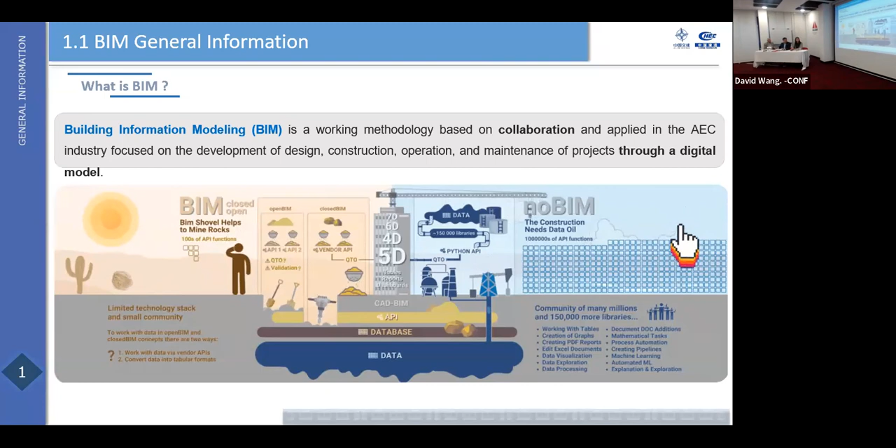Next one please - that's a brief history of BIM development. This concept came out from the 1970s. It was quite preliminary, and gradually it developed, changing the name, concept and content, up to 2001 when the name was fixed as BIM.

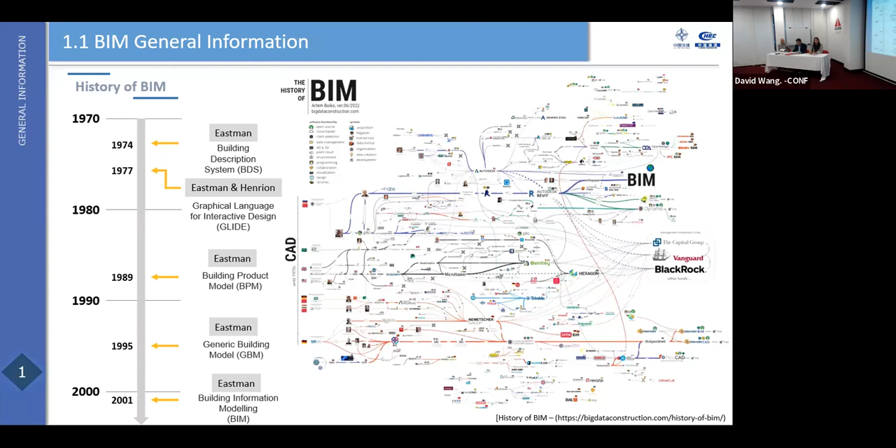You can see on the right hand side, from CAD - computer aided design tools - through different paths, multiple paths of people and technologies, and finally we got BIM technology. Nowadays it's well known, and all the developers and projects come with this.

Okay, so when I talk about BIM, we cannot avoid talking about the level of BIM. Here we start from level 0, 1, 2, 3 - that's the common use from the modern engineering design stage. Level 0 is quite a classic way.

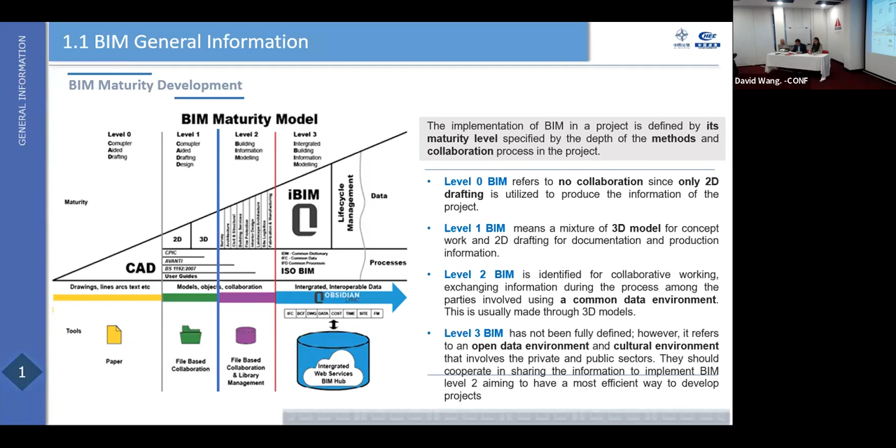It's just 2D drafting, and at level 1 we come into the 3D model and 2D drafting and production from the 3D model. At level 2 we started considering all the models - we need to build a common database for all the models. At level 3 we create an open data environment for crossing the disciplines. So that's the three levels for BIM.

So next slide, we're going to show the full picture, from 1D to 6D. That's for now - most of the design stage we stop, we go up to the 3D, level 3.

And from level 4 - actually we have level 7 at the end. From 4D up to 7D is for the construction and maintenance, the operation maintenance, and the project management.

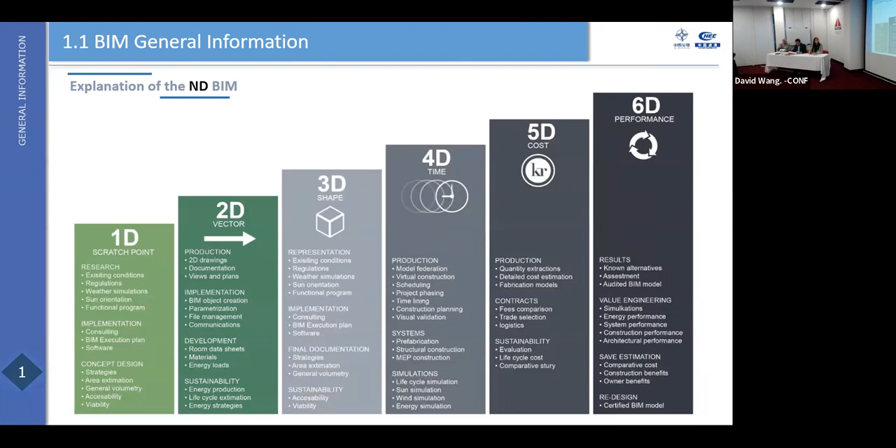Okay, here is an example - I don't know whether it's showing clear. There's an example for the BIM execution requirement. Normally, when we get a project, especially a large scale project, we'll plan the project in BIM in line with the planning stage, design stage, construction, and operation - the full life cycle. So I just want to show you BIM applications over the life cycle.

At the moment we have the international standard, and for this kind of project, during the planning stage, we have to start to know what's the requirement or needs from the operator, because in BIM, like I said, the information is the key, is the core for this technology. So the information has to start from the planning stage through the design stage, construction stage, operation, and finally handed to the operator.

Okay, so you can see this - you can see the different bar, some applications from the plan stage all the way through to the operation stage. Like the modeling, the cost and quantity, sometimes for coordinations, and some like property codings. So this will be all the way from planning to operation, and some are just for a single stage, but it will be covered.

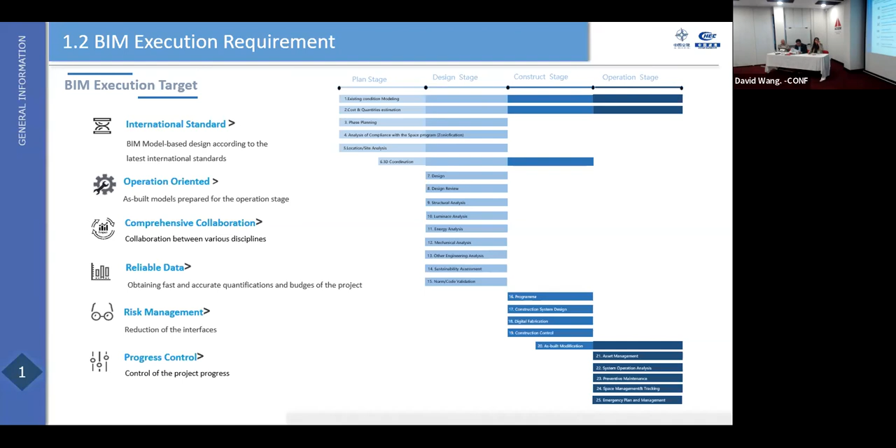So this one has a little bit more detail for the arrangement, from the design, construction up to the operation and maintenance. So the demand from the operational team shall be highlighted in the design and construction stage, such as the information, the LOD, and asset coding. That's quite important, because that coding is like the ID for everybody. So the coding in BIM is like the ID for every single element from the beginning. So when one element is created, it should be allocated a code. This code will be permanent with this element, no matter if it's a pile, a beam, a column, or mechanical equipment. So this kind of asset ID is quite important, and has to be agreed upon from the early stage between the designer and the operator.

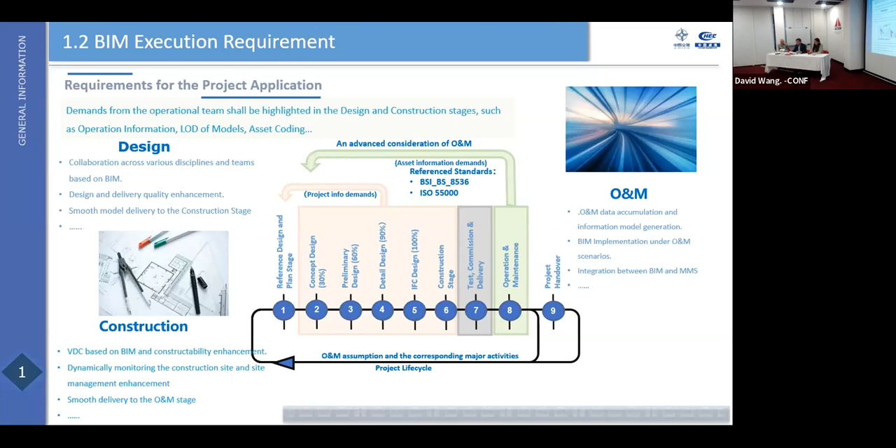Otherwise, the designer will have their own understanding in asset management. Sometimes the operator comes into the picture a little late in the project. We had some experiences where when the operator comes late, they have their own system, their own procedures to manage the assets, and maybe this is totally different from the designer's understanding. So there will be a disaster, because at that moment the design is almost done and maybe construction has started, and all the information is attached to the model. If we want to rewrite this model with the new code, that would be a lot of work and could create more errors and mistakes. So that's why I want to highlight that the coding in BIM technology is quite important at the design stage. As experienced designers, we have to grab all this requirement before carrying out the design works or the model.

Okay, this is a general sketch for the BIM organization. So just as an example, for a PPP project we have a concessionaire, leading designers, some design subcontractors, the project management team, the delivery team, and the downward executive levels, the disciplines. You can see this sketch with different circles. So it's centralized with the concessionaire, and the designer is quite critical at the design stage. Going outward are the subcontractors, the management team, and the delivery team. So that's the position of every different role in the project in the BIM organization. So the concessionaire's requirement is the most important.

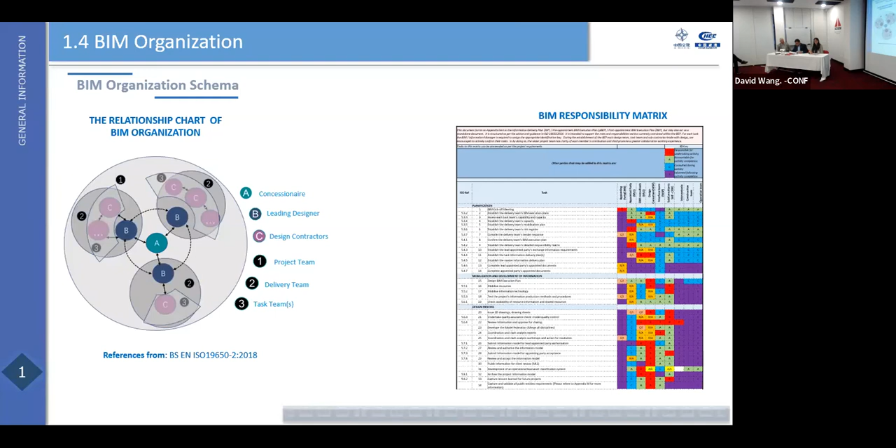On the right hand side, this is the responsibility matrix. It specifies in detail the responsibility of different roles in certain single actions. So we can share this information with you. After that, it's a little small to see.

First of all is coordination, because for the large scale project we have multi-disciplines. Every single discipline has their own design standards, but the coordination between disciplines is quite important. This is a fundamental guarantee for the BIM model. When we create the BIM model, all the disciplines have to talk to each other every day, to make sure all the models are perfectly matched to each other.

Secondly, about communication. This communication is different from coordination. Sometimes this communication is from the client, from third parties, from suppliers. So communication from outside, from external sources, also has to be paid more attention to, because that external demand is also an input to the design.

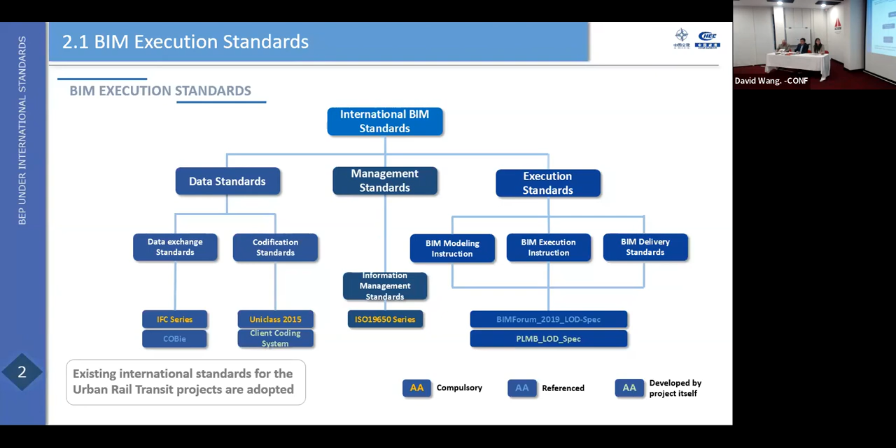Okay, next one. So that's the picture for the standard. ISO 19650 is the first international standard shedding light on how to conduct the life cycle from design to asset management based on BIM uses.

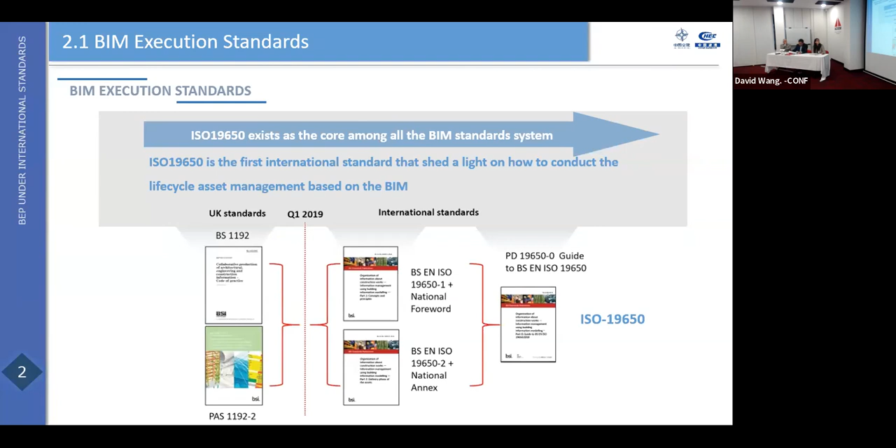Okay, next one. So that's another one showing the execution. We have Uniclass for the codification, and also LOD for the execution.

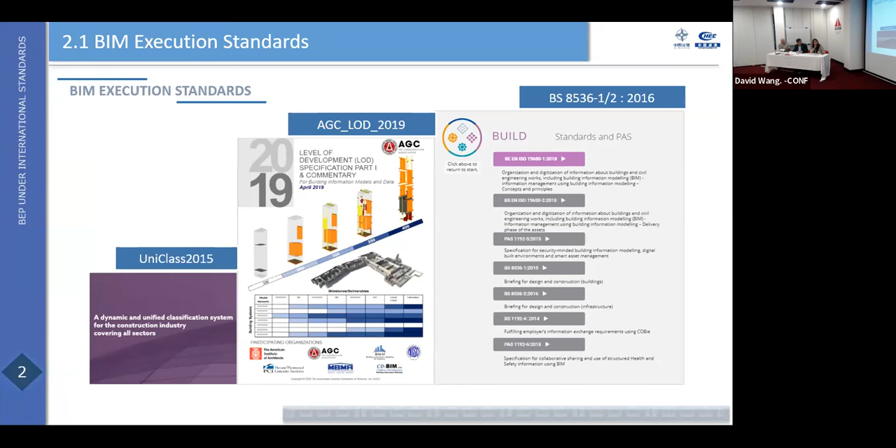Next one. Here's the BIM roadmap. We just listed the different BIM uses across the different stages of the project. In total, there are about 25 BIM uses through the different project stages. You can see the bar at the bottom with different colors - this is the development from LOD.

LOD means the precise level of the model, with the details of information attached to it. Normally, by the end of the design stage, the LOD should reach 350. After that, throughout construction, the model has to be developed with construction activities, such as quality inspection records, materials, suppliers, maintenance manuals, and defects or NCRs. All this information will be added to the model, in addition to the design information.

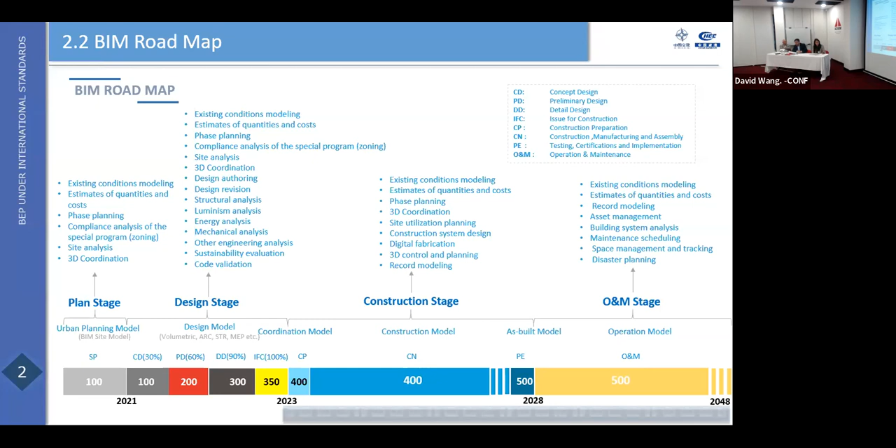So when we reach O&M, operation and maintenance, the LOD will reach 500, with additional information from testing and commissioning. So that's the LOD development roadmap.

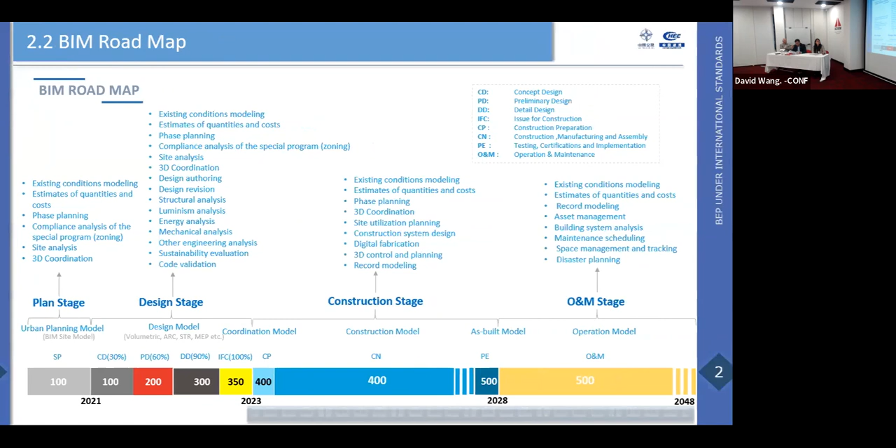So that's the BIM execution plan. That's quite famous - it's the mandatory document for every single project if we want to use BIM technologies. The BIM execution plan is quite critical for every single project.

It includes the BIM standards or resources, organizations, codifications and standards, standards or manuals for modeling, standards of procedures for model reviews, quality controls, and also information exchanges, and finally the delivery standards.

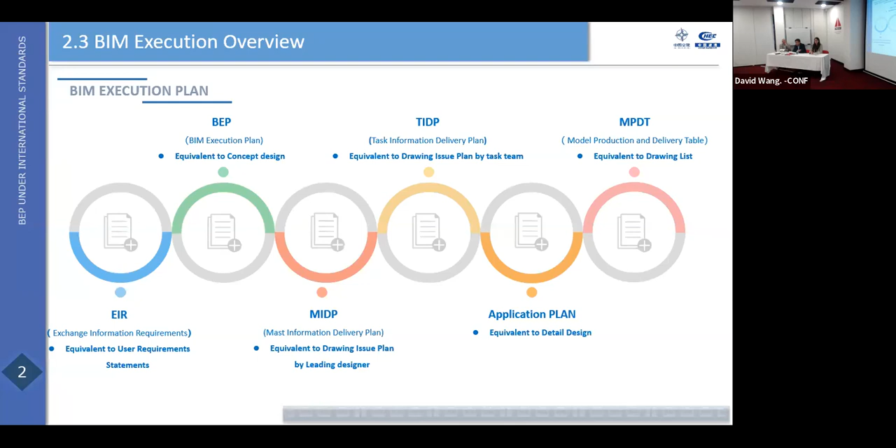So like I said, we have quite a guidebook for every designer and engineer who knows how to place BIM technologies into their daily work.

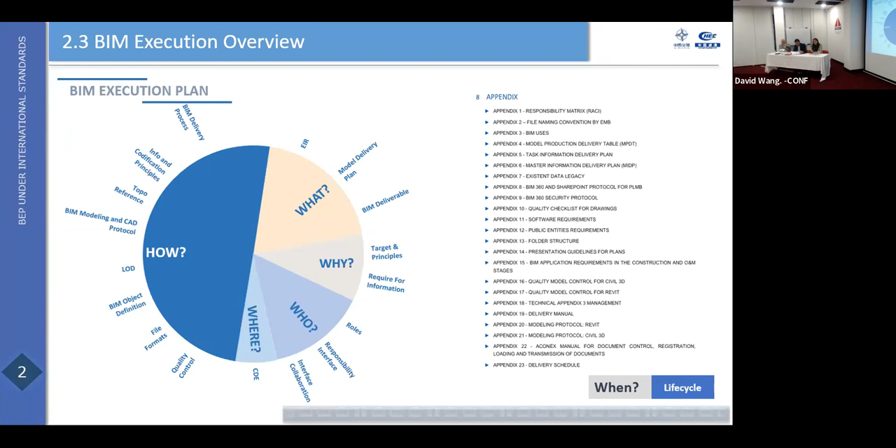In different stages, we have different parties, different teams joining the actions. At the beginning, the BIM development stage, most designers, drafters, and modelers are the majority of resources. In the internal coordination stage, the interdiscipline checks, coordinations and communications are quite important to make sure the individual models from different disciplines can work together, with no clashes or interferences.

For example, sometimes during the design stage, one discipline could be changed for some reason, but these changes have to be notified to other disciplines. So they take actions to do harmonizations and engineering checks. If they have any problem accommodating this change, they have to feed back their comments to the original parties who proposed the change. So this is not a one-round communication, it's several rounds until they reach agreement on the changes.

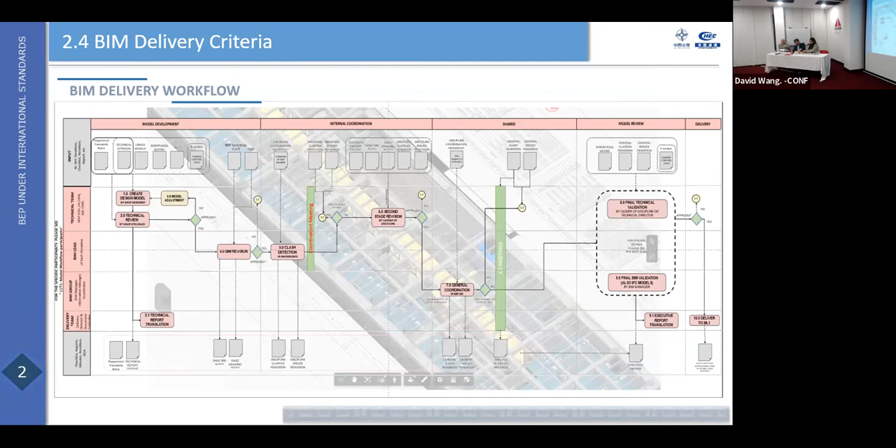From different angles, we have self-inspections. That means when the modeler starts creating a model, the company or project shall have a drafting manual or modeling manual to standardize all these modeling behaviors, from the IT development or operation level, the operation standard of the software. When the modeler completes the modeling, they have to check a checklist with different items of the basic requirements or standards. That's the self-inspection or self-check.

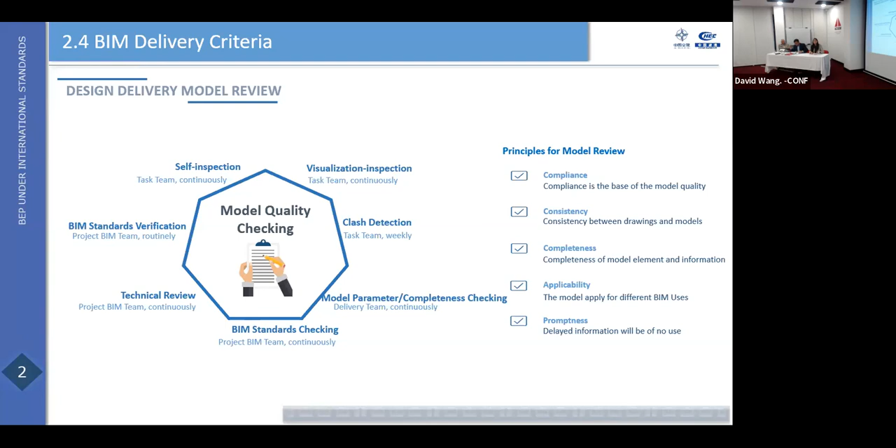So normally we put the model down to the work package level. A work package is for a location and discipline. So structural is a discipline, but the work package could be down to different locations, like one building or one segment of the road, or the corridors. So one work package should have a single BIM model. That's one-to-one, easy to check and easy to do the integrations.

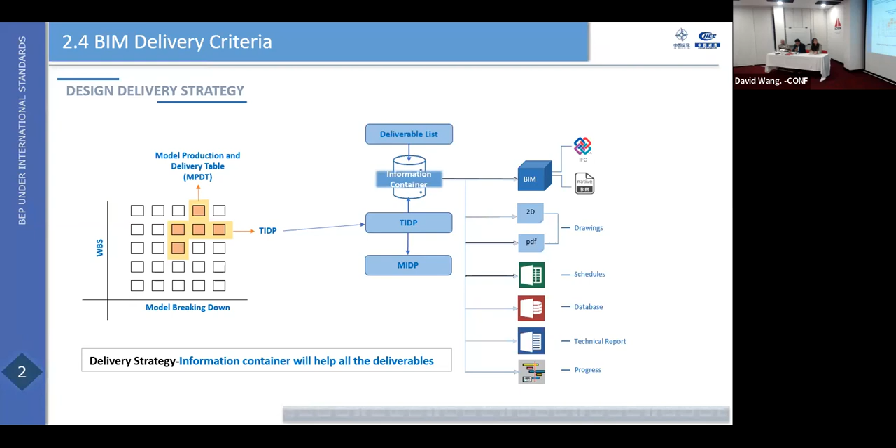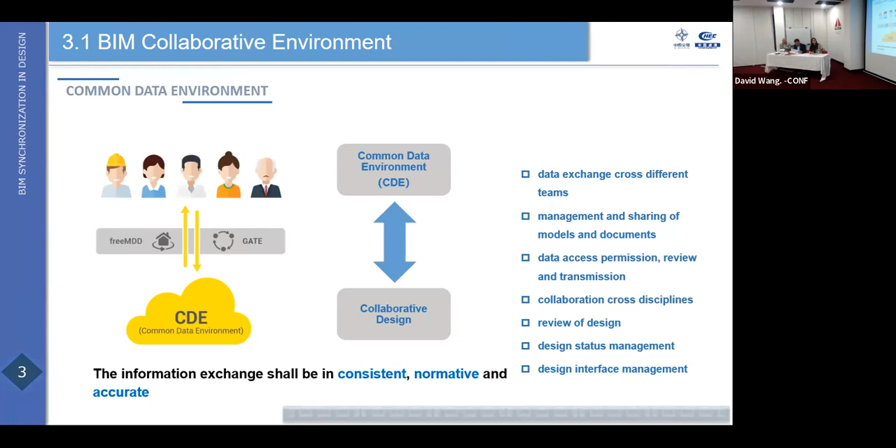So the information or the BIM from the design department - sorry, in the center is the core of the CDE. We selected SharePoint, Microsoft Teams, and BIM 360 as the core of the CDE to take care of all the information.

On the right hand side is the design group. We have different disciplines, more than two design contractors and suppliers, responsible for design and modeling. All the information is sent to this core of the CDE, and this combination of software has the functions to do storage of information and real-time communications like Microsoft Teams.

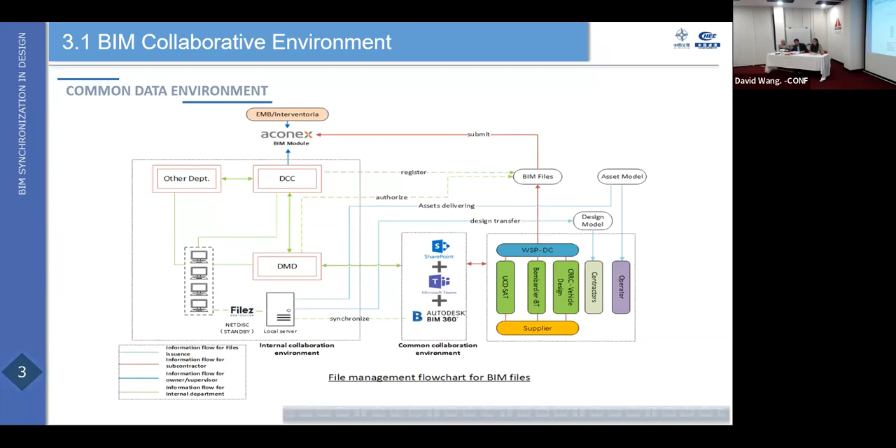So when the model enters the CDE, they will run through shared folders, whatever reviews, technical reviews, run this circle, and finally put it in the public folders and back to the modeler. The modeler will be notified after the procedure in the CDE. They get comments, and they will work again, and when they fix the problem, they release the model back to the CDE.

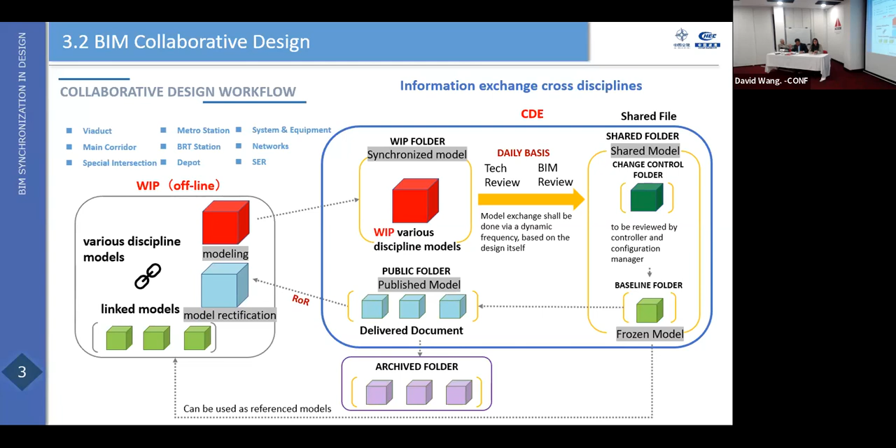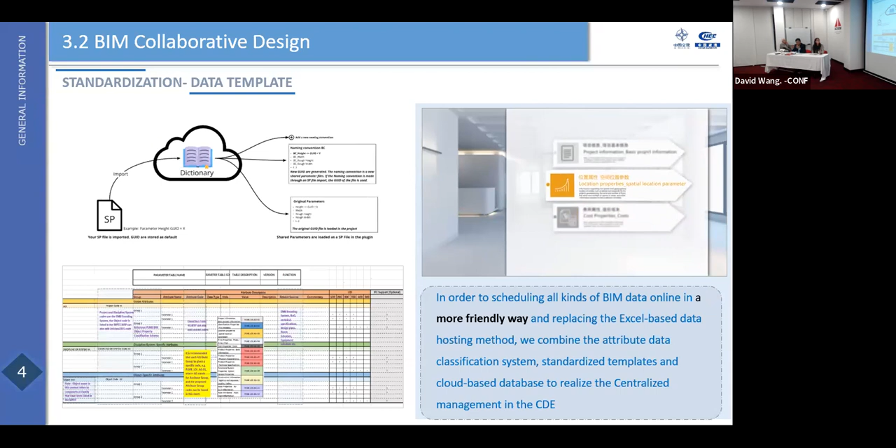Okay, that's the standardization of a data template. This is quite detailed because in order to schedule all kinds of BIM data online, we need to formalize the data template, instead of everybody doing it a different way. We combine attribute data, classification systems, and a standardized template with a cloud-based database to realize centralized management in the CDE. All these templates, tools, and procedures are for running the CDE without any issues. The CDE is a very useful tool for cooperation in design.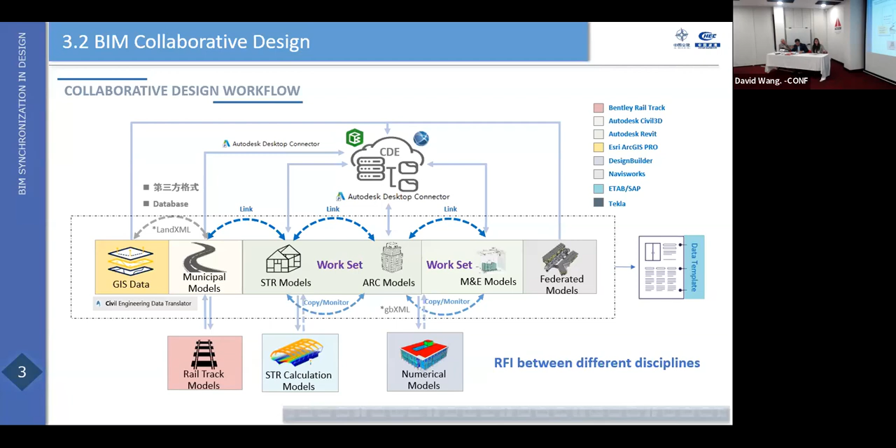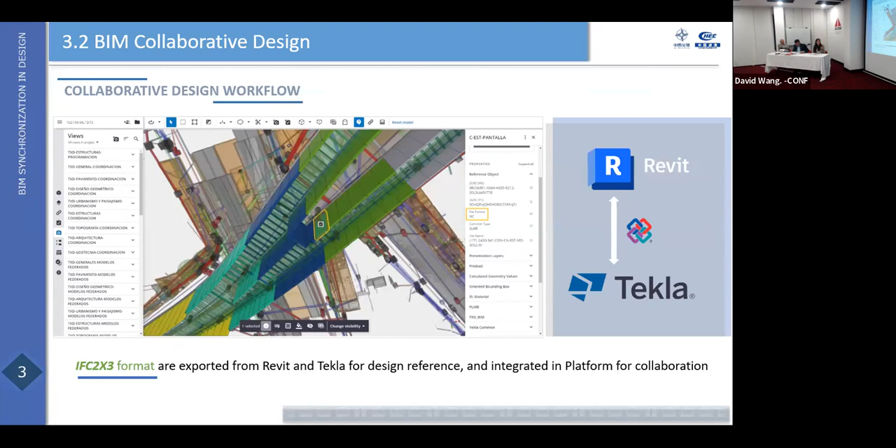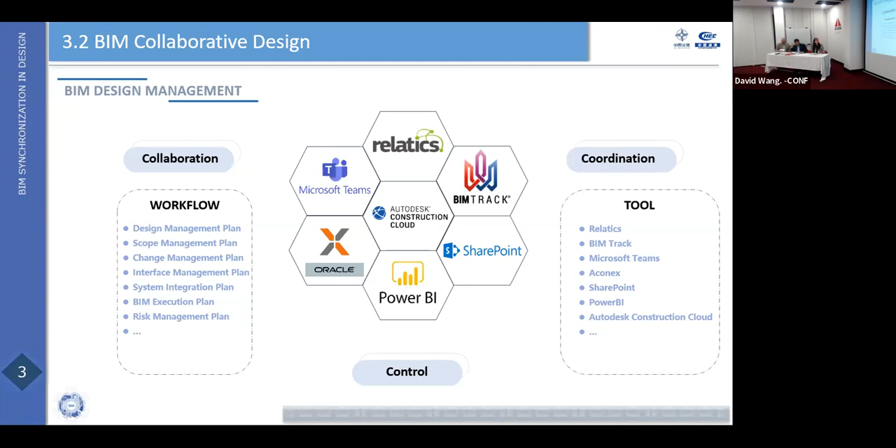This is about BIM design management. Now we have different software or platforms to handle project management or BIM management. For example, Relatics is for the interface, BIM Track is for clashes, and SharePoint and something like that. So we have more tools to handle this BIM management.

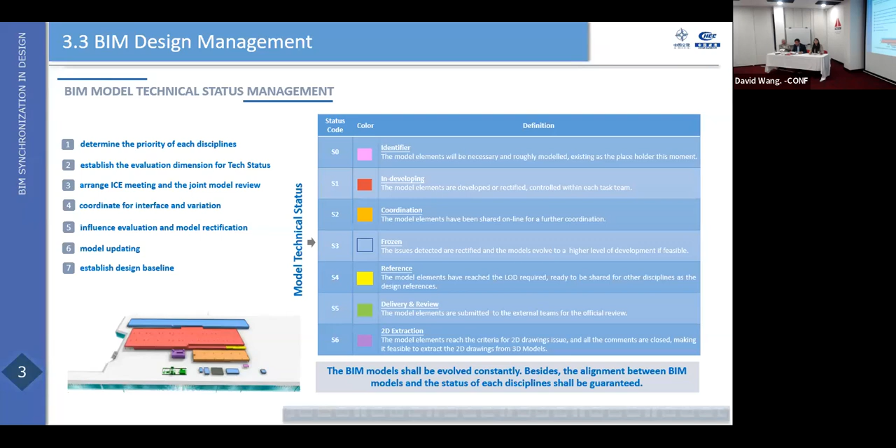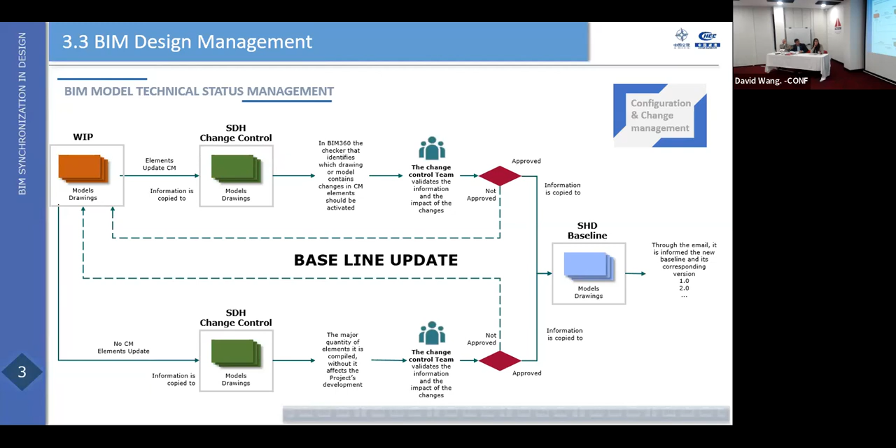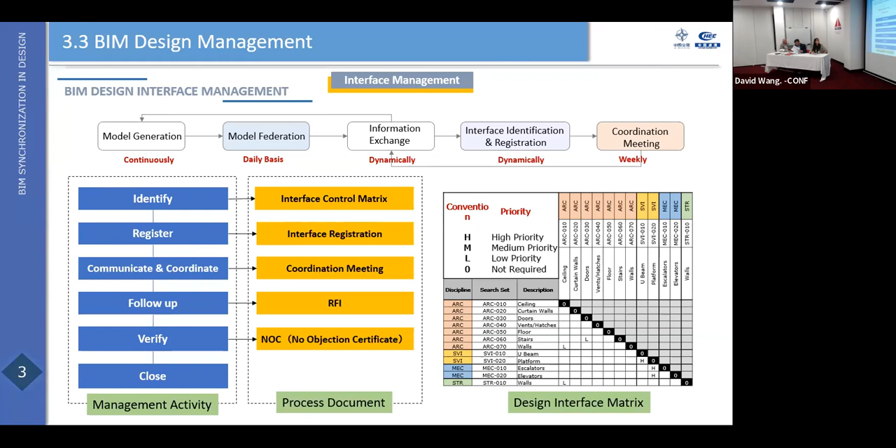This is also an example for BIM uses in interface management. Normally, traditionally, we use a matrix for interface management. As shown in the table on the right hand, we have different disciplines, and we mark in the matrix who's the interface owner, who's the party to support this interface, provide input or reviews. With BIM technology, we can visualize this. If a member or some building has an interface still open, it will be shown in different colors, highlighted to the reviewers. When you click on that member, you'll see the information of the interface - who's the owner, who's taking it, whose action is still pending or delayed/outstanding. So we take actions through the BIM model.

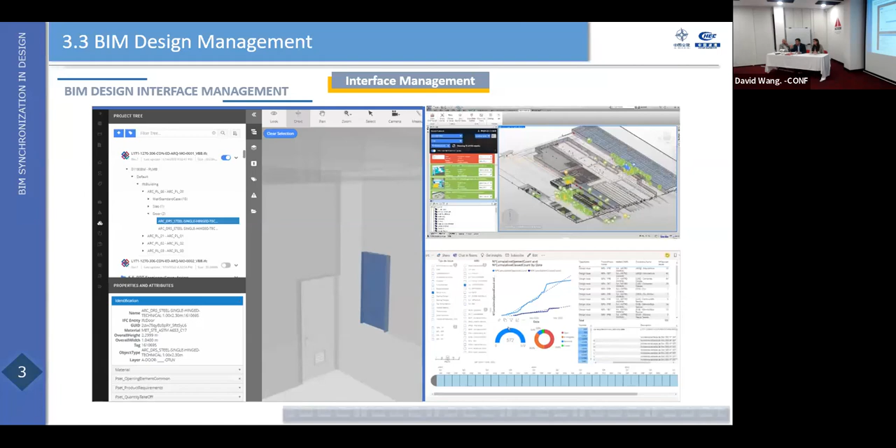From this part, we talk about construction applications. I'm not sure if this is widely used in Colombia, but it's quite widely used in China, because sometimes the area of the construction site field is quite large, so we normally use monitoring and sensors to control the site.

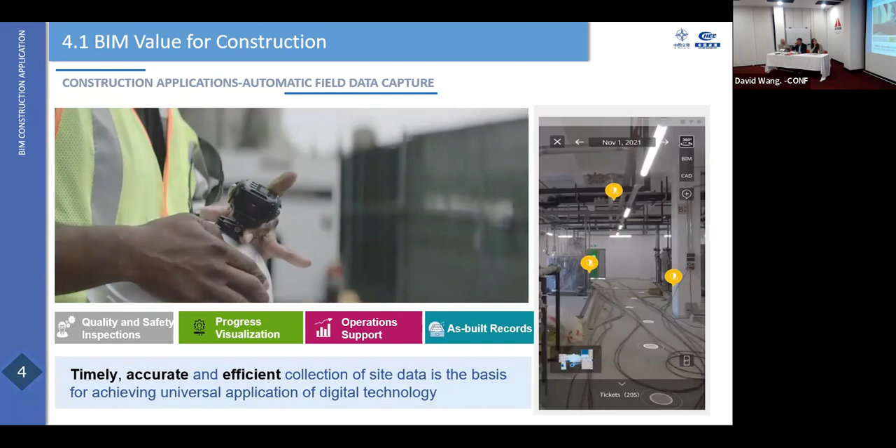This is new technology that just came from the United States. When the camera is fixed on top of the helmet, as the person walks, the camera catches all the information and transfers it to the BIM center. They can then come up with the real or simulated pictures in 3D.

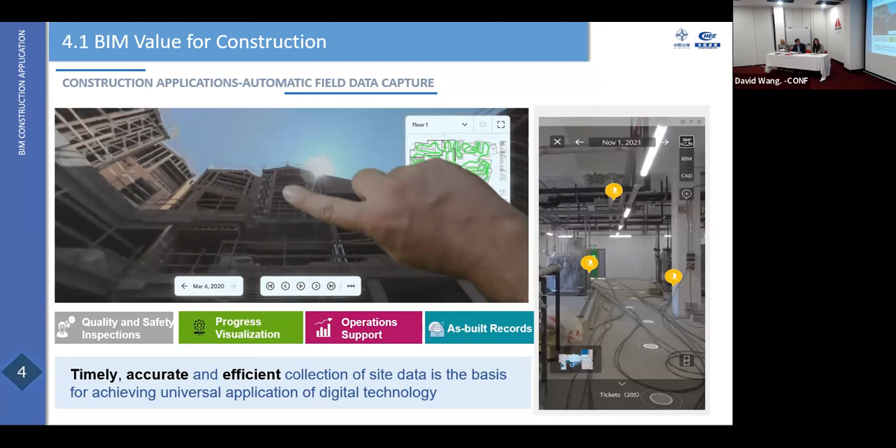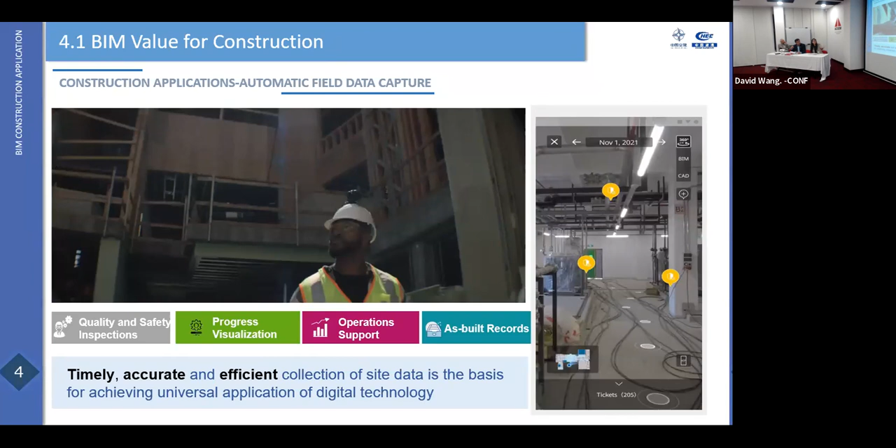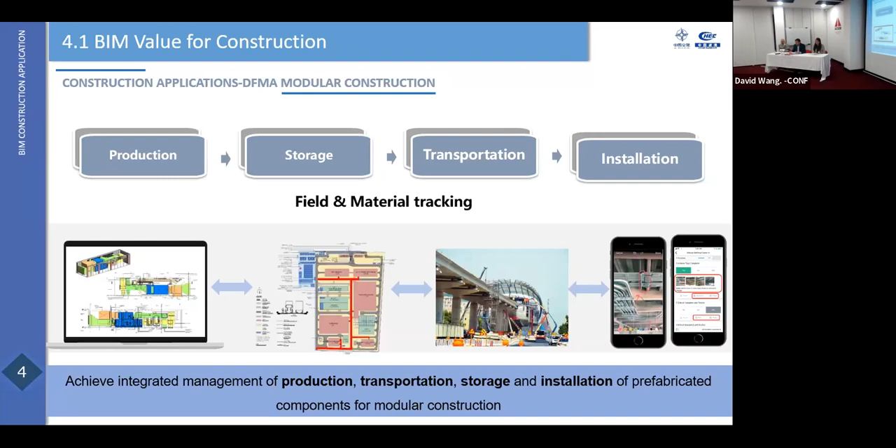This one is about the simulation of construction. With the design models, the contractor could put their idea into the construction, like sequences and machineries, how to place their machineries, and how the building is built, starting layer by layer or floor by floor. So this is a useful tool for the contractor to practice their proposals before putting them into the real planning.

When you want to know the information of some parts or elements in the building, you just click on that in the digital model. So they're identical, like twins - one in the real world, the other in the digital world.

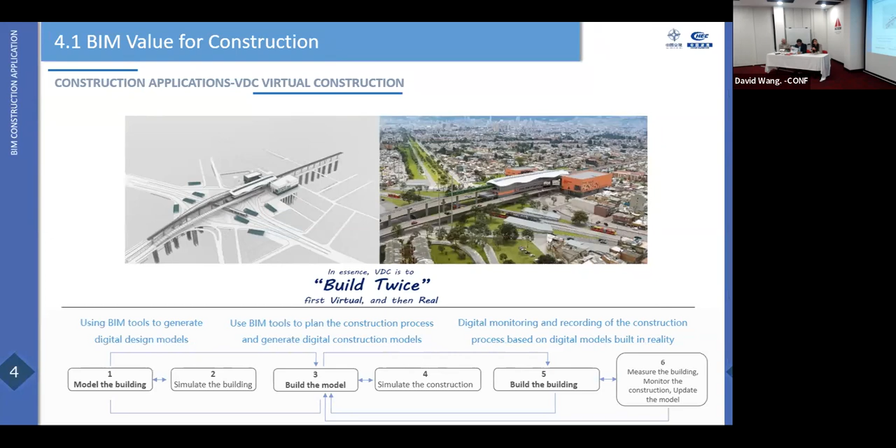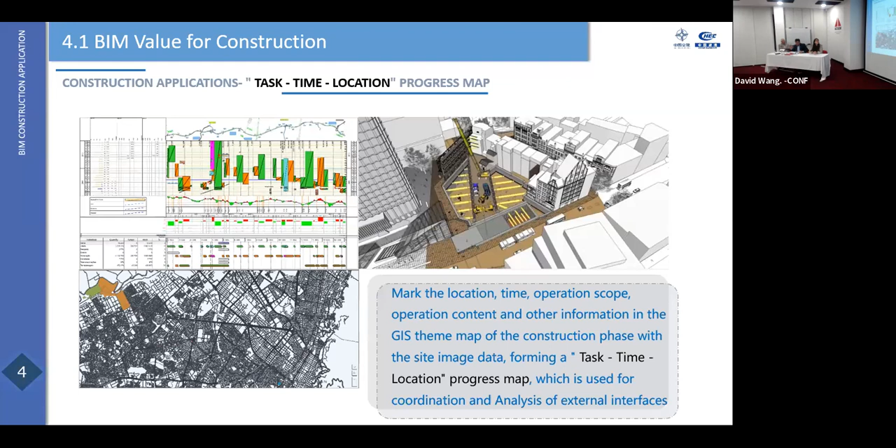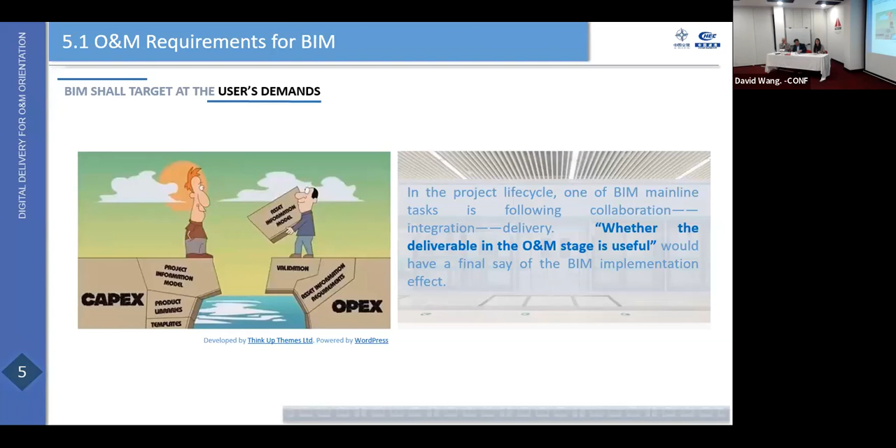Here's another example of how to put BIM to use in the operation stage. We call it the BIM plus MMS platform. MMS is like a property management platform for the operator. At the moment, as far as I know, the world is still at quite the beginning stage with this.

A lot of companies, operators, spend a lot of money on studies, on how to make this MMS platform useful and intelligent in maintenance, to reduce maintenance cost - especially management cost - and also reduce the risk of accidents caused by human judgment. So with the BIM...

It will provide large, comprehensive data from the beginning. We call this assets - asset means everything, the permanent structures and properties for the project. The operator has to manage everything, so they would like to know every tiny article, where it is, how to replace them, when they have to replace them, where the suppliers are, how to get supplier information, how to order the parts, and how long it takes for the part to arrive.

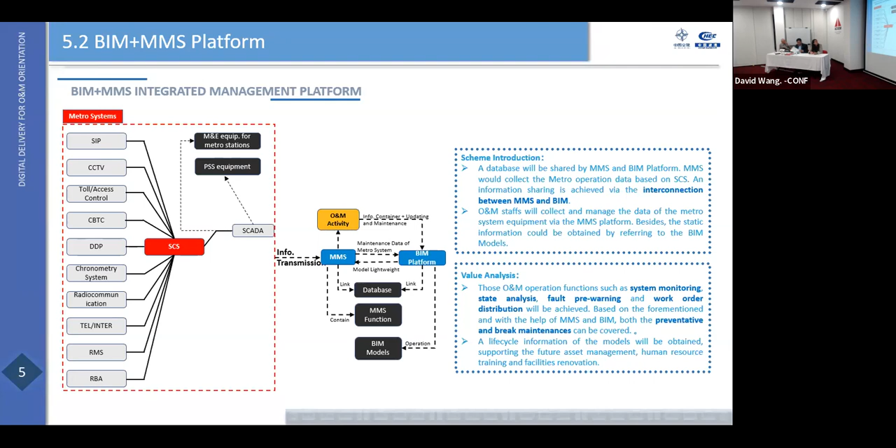Okay, so that's what the management platform looks like, but this one is still under study, I think - it's not yet quite a developed product. So that's the future.

But the modules for the platform are the basic parameters, O&M parameters, asset management, and data and information.

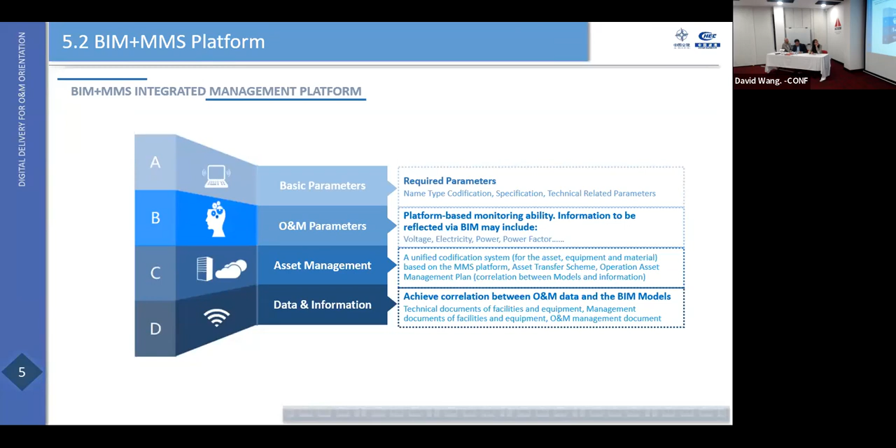...should be defined during the design stage. What is an asset for the operator? Big machines or little ones? So they have to divide by different operators. They have different focuses. Maybe some operators just focus on the big properties, but someone who really cares about cost will come down to very simple, very tiny particles. So this depends.

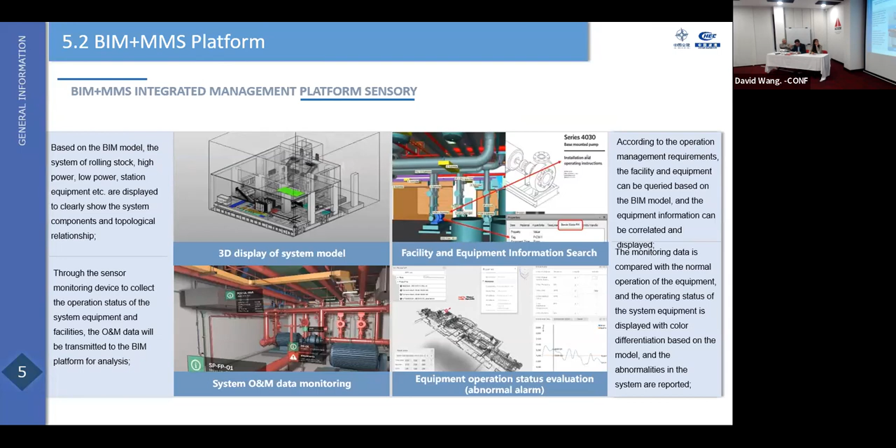Okay, and the system and O&M data monitoring has indicators attached to it. If you open that, you can see the status with monitors and equipment operation status evaluation. There are multiple functions in these status evaluations, but they have to be set up by the operators.

Okay, that's almost all. So, sorry, some Chinese here. This is to share some pictures from the China Harbor project with BIM models and BIM technologies.

This one you guys may be familiar with, it's the Panama Fourth Bridge. We know the project has been suspended, but I heard they're going into negotiation stage and maybe will restart pretty soon. We had planned with the designers 100% BIM use and the forwarding design procedures.

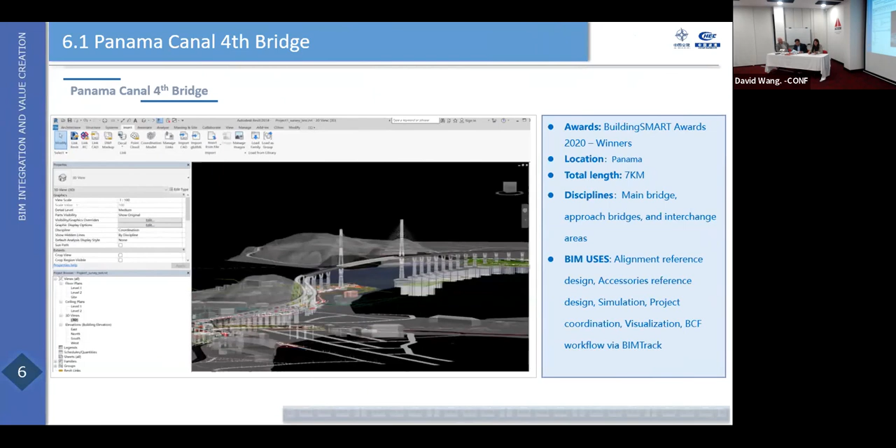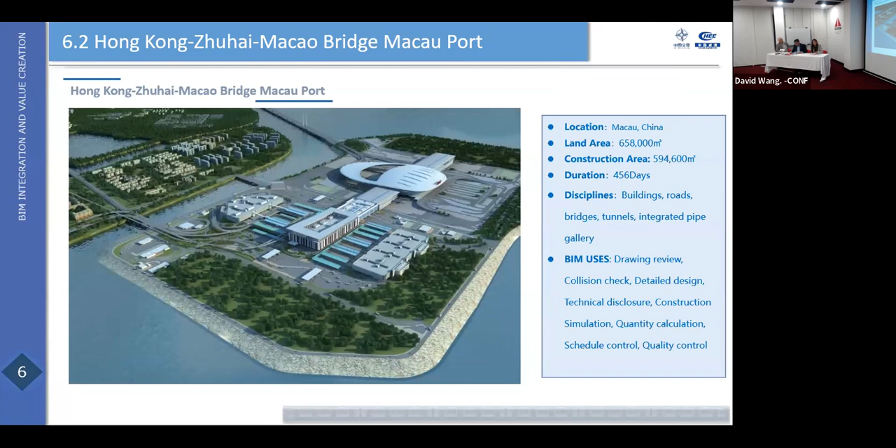Okay, and the other one is quite a long cross-sea bridge, the Hong Kong-Zhuhai-Macau Bridge. I can't remember the length, but the picture shows one of the starting points of this bridge is in Macau. All these buildings and facilities are designed with BIM elements. This project won a lot of awards in BIM.

This one was my project in Sri Lanka, Colombo Port City. It's under development, so BIM is starting to be used for this project. This is a city with multiple functions: living, business, entertainment. So BIM has to be used for this kind of large scale project.

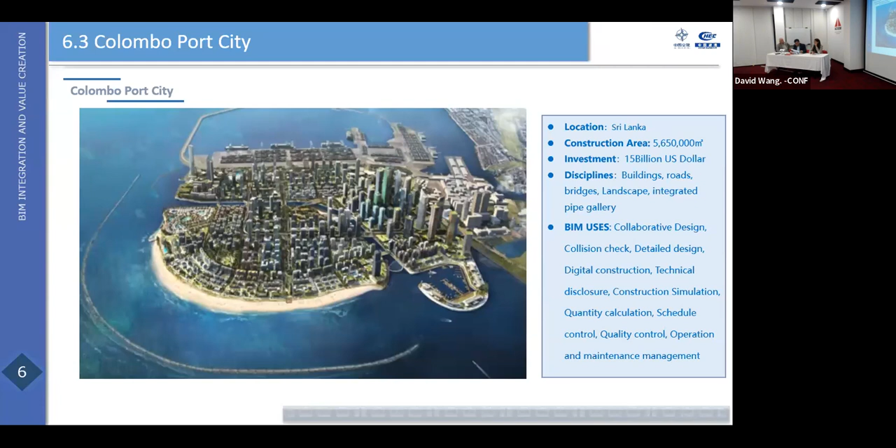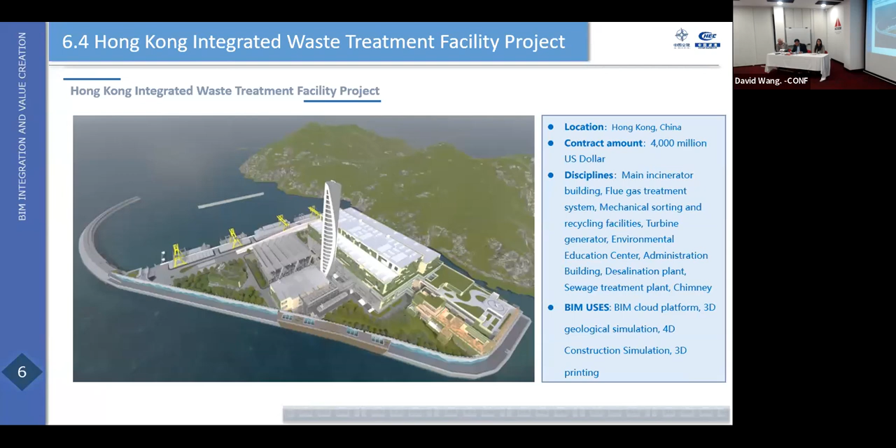Okay, the last one is about the Hong Kong waste treatment plant. This project is under construction now, and BIM applications were well used in this project, through 3D and 4D, with the same LOD to us. It's LOD 500 at the end of construction.

All right, so we reached the final page about the value. Based on the experience I have at China Harbor, we've had a lot of projects with BIM technologies and BIM uses. We think these techniques really help engineering, not only for design and construction methodologies, but to avoid risk, avoid reprocessing, and control costs and time. So if we widely use this and integrate with other technologies, we'll make more value for the project in terms of time, schedule, and technical compliance.

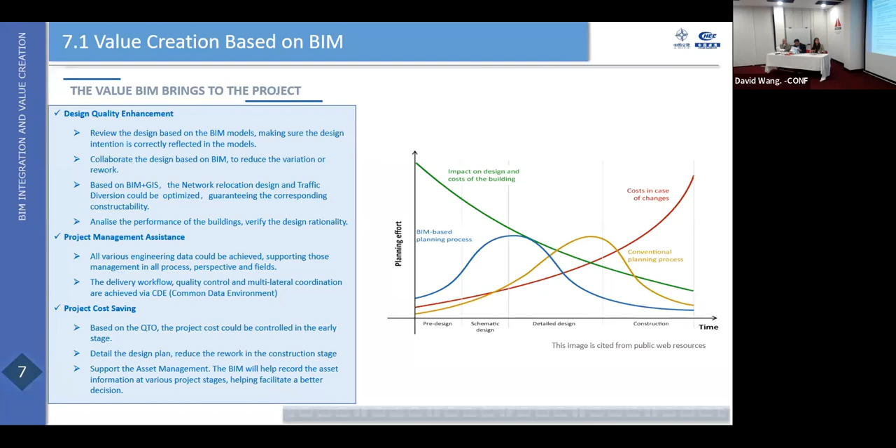Okay, so that's about my presentation today. I believe today was too short, almost an hour, but still too short. This was just an opening to introduce BIM technologies. From my personal view, BIM technology will keep developing, maybe with AI and other technologies, and will be the fundamental for future development. I'm looking forward to meeting you guys again, so we can have more exchanges and opportunities.